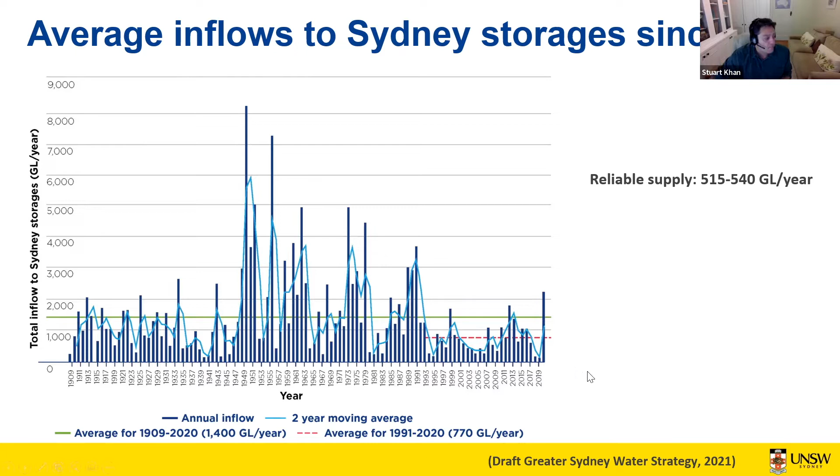And if we look at the current demand, it's slightly more than that - it's around 550 gigalitres per year. So we're already sitting at a point where we need to be thinking about whether we have enough water security in Sydney to get us through the dry periods.

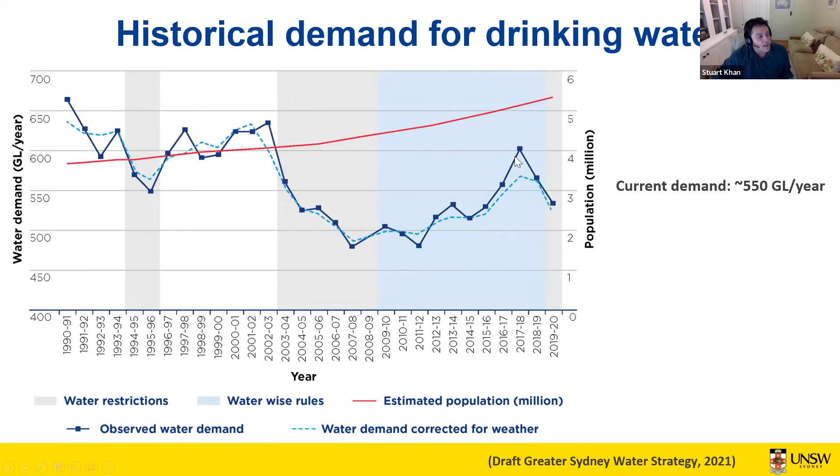So what we found is that during the millennium drought, when we found efficiency opportunities, after the drought finished and the water restrictions finished, people didn't suddenly rip out their dual flush toilets and low flow shower heads. A lot of that efficiency was maintained, and it's slowly increasing now, more or less in line with population growth. So we need to think about the fact that we probably already need to be planning for future water supplies, and that problem will increase over time as demand increases.

That's the way that we normally think about reliability of a water storage or water supply. However, the drought of 2017 to 2020 was a real wake-up call and made people start thinking about this in a little bit more detail.

We had a plan - the Metropolitan Water Plan in Sydney - which tells us that as water storages start to drop, you bring in new measures. You turn on the desalination plant, you implement water restrictions, and the restrictions get increasingly stringent. Eventually you build the next stage of Sydney's desalination plant, so we can supply 250 megalitres per day from that plant, but we can expand that to 500 megalitres per day. Then further down, when supplies really get low, that's when we start to say, well now we build the next piece of infrastructure - but it was never clear what that next piece of infrastructure was.

What we saw during the recent 2017 to 2020 drought, if you compare that to the millennium drought which had previously been Sydney's worst drought on record, is that we could go from more or less full dams to 50% capacity. It took about 4 years for the millennium drought, but this drought we went twice as quickly. There were fewer replenishment events, and the demand on that water stayed quite solid throughout that period.

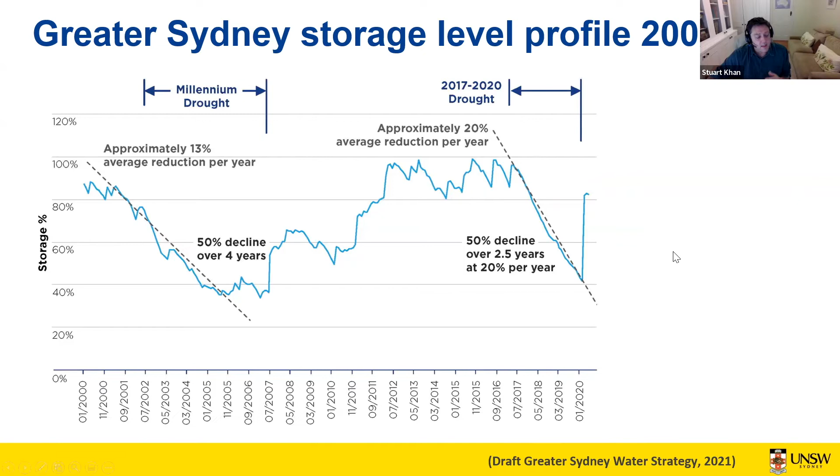Rainfall independent water supplies - so now we're thinking about needing a particular reliable yield that we can produce water from year after year. But not only that, we need to be able to get through these extreme droughts. The way it has been identified that we can increase resilience to those extreme droughts is to have some water in our system that is not dependent on rainfall - if it doesn't rain, the water is still there.

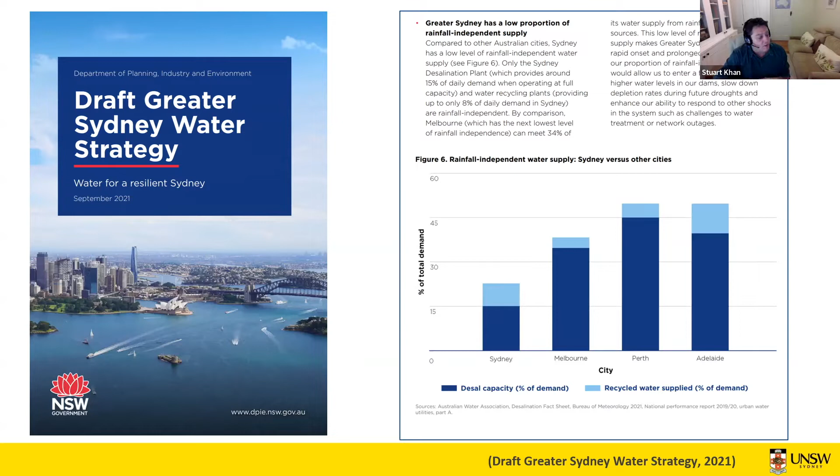That means we're much more vulnerable to a lack of rainfall, to drought, than some of these other cities might be. So thinking about how we've built in rainfall independent supply in Australia, most of our big cities now do have seawater desalination. It has been the first port of call. Seawater desalination is an engineering solution that often we end up with if you've run out of time to do anything else. It has the advantage that there's no competition for that water.

There are some public acceptance issues, but generally they're considered minor compared to public acceptance issues around things like purified recycled water. We see seawater desalination plants around the country that are now capable of supplying between 15 and 40% of the local drinking water supply, with Sydney at the bottom of that range.

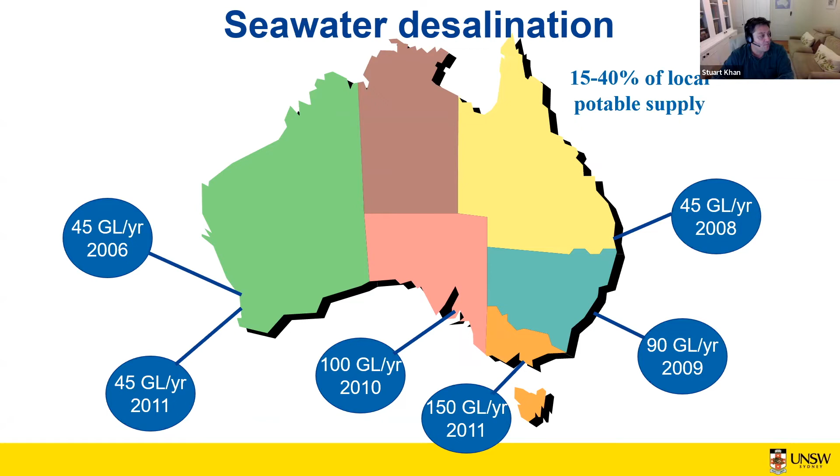In terms of sustainability, one of the big issues with seawater desalination is the amount of energy required to produce drinking water from saline water, seawater at 35 grams per litre salt. That was a really big issue when Sydney's desal plant was being constructed, and it was a big issue for all of these plants.

I think this is worth noting, how that has been dealt with to some degree. In the planning approval for Sydney's desalination plant, there was a requirement written in that the energy used by the plant, which is a significant amount relative to energy use in Sydney or New South Wales, would need to be offset by purchasing green power.

So Sydney Water, or the Sydney desalination plant, purchases green energy from a wind farm, the one down at Bungendore, which is the one that Joe Hockey said was an eyesore he doesn't like looking at. But there's a couple of really interesting things that came from that.

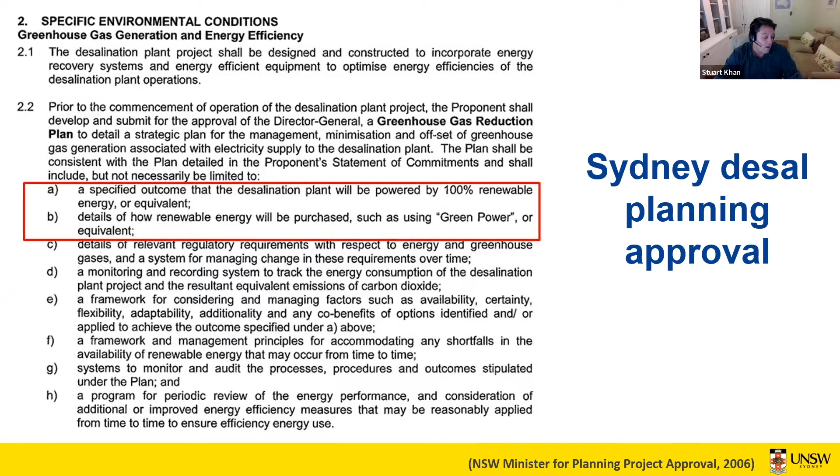To my mind, it really kickstarted and enabled the start of a wind energy supply in Sydney. It's a bit like when you think about big shopping centres, they need their big anchor customers, the Coles and the Woolworths, before it can be viable for Joe's bookshop or the smaller customers. It was this big anchor customer, the Sydney desal plant, that really made that wind farm a viable option, and therefore made a real contribution to the availability of renewable energy in Sydney.

That was a trend followed by all of the desalination plants at the time in Australia, and this isn't something you see in other countries. It's really a unique Australian thing, where all of those desal plants were approved with requirements to offset their energy, which of course comes from the grid, a coal-fired grid, but the amount of energy used from that grid was being replaced with green power, across the board at the time. There's been a little bit of backsliding on that, but not a lot.

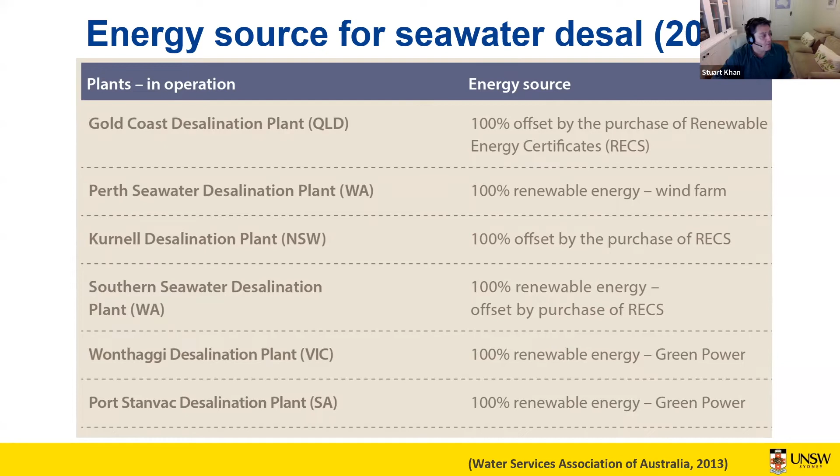So that's one form of rainfall independent water supply. Some other cities that are inland, for example, that don't have access to seawater, like Orange, have come up with other solutions. In Orange, they find that during a drought, when it rains, the soils don't generate a lot of runoff. Our catchments don't generate runoff because the soils are dry and act like a sponge, soaking up the rainfall that lands on them, so it doesn't run off into our dams.

In Orange, they built this urban stormwater harvesting scheme. There's a creek that runs through Orange, the East Orange Creek - in fact, this is really just stormwater drains, though this part is more of an open creek. That creek continues to run during droughts every time it rains, because the water in that creek isn't landing on dry soil, it's landing on impervious surfaces - footpaths, roads, roofs of houses - which then runs down and fills this creek. So the creek runs even when the drinking water catchment produces no runoff.

So Orange built a scheme at the end of the Millennium Drought where they capture the water from that creek, the urban stormwater - they store it, they treat it, and then they pump it into their drinking water supply reservoir, Suma Park Dam.

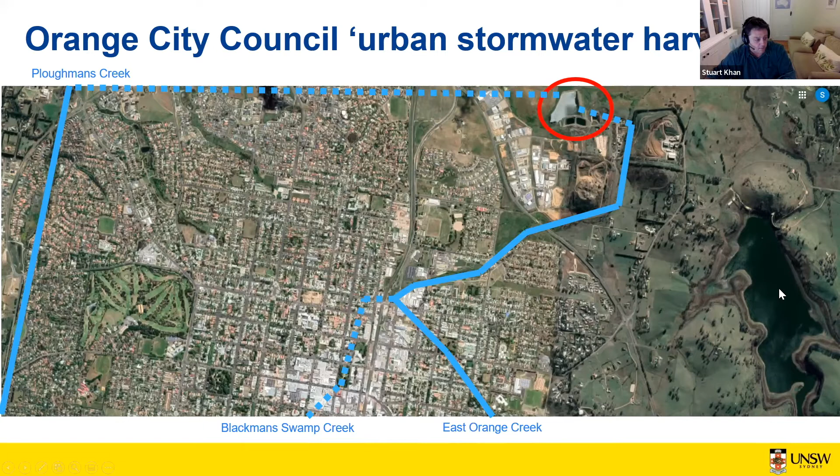This is an example - the ex-mayor of Orange, Reg Kidd, talking about how during the most recent drought, November 2019, they had a few small rain events in the last few weeks that didn't produce any runoff into their normal catchment, Suma Park Dam, but the stormwater harvesting scheme did. So it's a way to build in that resilience. You wouldn't call it rainfall independent, because obviously it depends on rainfall, but it's much more drought resistant - much less reliant on heavy rainfall than conventional catchments are.

Here's another picture I took off Twitter, of this lady, Manu Saunders, getting on an aeroplane in Armidale. She took this photo out the window, captioned: Armidale, where the only green spot on the landscape is the sewage treatment plant. You can really see it - it's very dry around here, but there's this lovely green patch, all being irrigated from water from the sewage treatment plant.

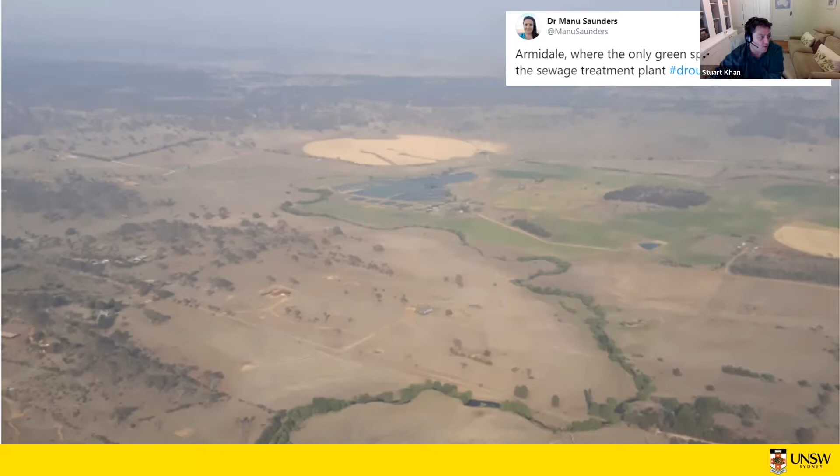So the sewage treatment plant is a very reliable source of water. Even during droughts, people tend to flush the toilet, have showers, and do all of those things. So we can learn from that, and think about the rainfall-independent, or rainfall-resilient, supply that comes from wastewater treatment plants.

There are lots of towns and cities around Australia that have started to make good use of that water from wastewater treatment plants, irrigating local sports fields, for example, and therefore maintaining those important community assets during drought and periods where there might normally be stringent water restrictions. So it's a resilient supply.

If you use that water for a use that you would have otherwise used drinking water for, then it ultimately adds to your drinking water, because you're taking an equivalent load off the drinking water supply. Furthermore, if you use it for a use that you would have applied water restrictions during a drought, then you still can potentially have that.

So this has been a very reliable, very successful thing to do for towns and cities around Australia for the last 30 years - recycling treated effluent for various irrigation purposes.

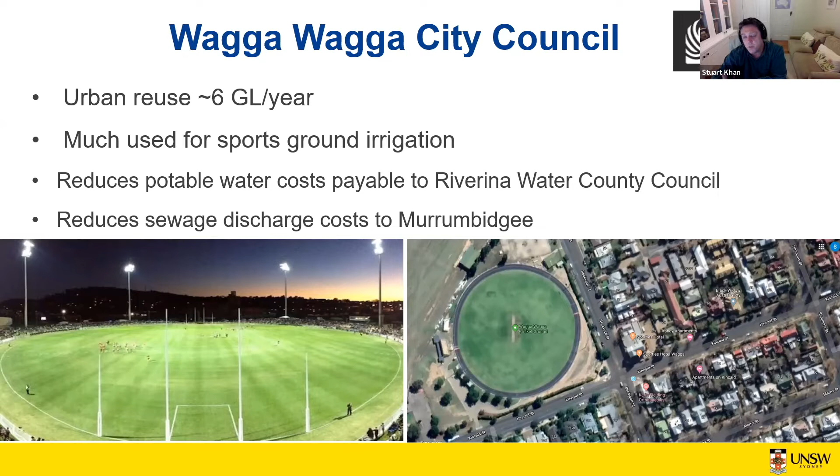And most local government areas don't have that type of storage availability. There are some exceptions, but generally it means you're only using a small fraction of the total wastewater that you could potentially be getting benefit from.

So that's why we've seen cities like Perth, for example, start to say, well, let's use the storage and distribution infrastructure that we already have for our drinking water supplies. Perth has been drawing down on their groundwater for decades, and they've started to say, well, we could take our treated effluent from a wastewater treatment plant, invest the money and energy in purifying that water...

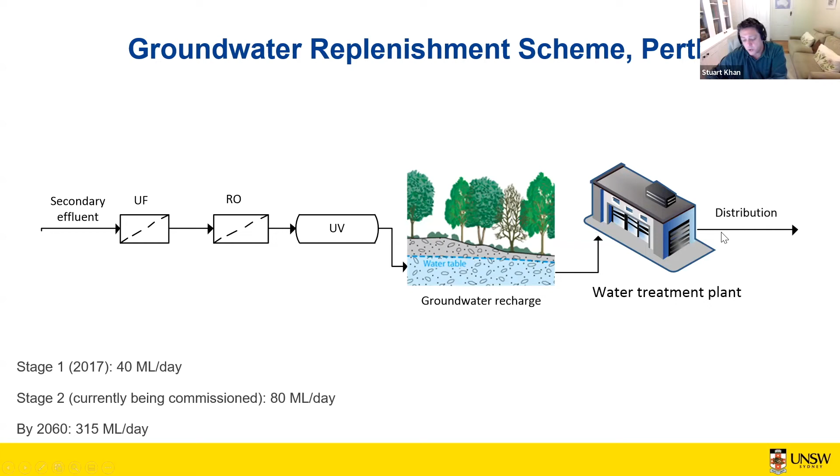...so that water is of a sufficiently high grade that we can now recharge our groundwater system that we use as a drinking water supply. So they pump the water underground into the groundwater supply, and then that becomes part of the drinking water supply. So they are reusing that water now, but without having to think about segregated uses and seasonal uses. It's stored and ready to be used in the same way as the rest of the drinking water supply in Perth. We've seen other purified recycled water schemes constructed, but they haven't always been as widely adopted for use.

In southeast Queensland, supplying Brisbane, the main drinking water supply is Wivenhoe Dam. It's been in the news the last few days because it's flooding up there, and it's flooded during the last few big events that we've had.

But there is a scheme constructed for when it's not flooding, when it's getting closer to being empty, where they can take purified recycled water from a series of wastewater treatment plants, treat it by advanced water treatment processes, and use that to top up Wivenhoe Dam. So they don't need an extra storage - they use the one they have, and that water mixes with all the regular surface water in that dam, is treated at the water filtration plant, and distributed to customers.

They built this scheme at the end of the Millennium Drought, which said we need some way of keeping water in Wivenhoe Dam. That drought, like the more recent one, was broken by flooding rains. Since the Millennium Drought, they haven't had the water supply shortage in that dam where they've actually needed to use this scheme, and they can't use it when it's flooding and the dam's full, because they're relying on some space in that dam which they don't currently have.

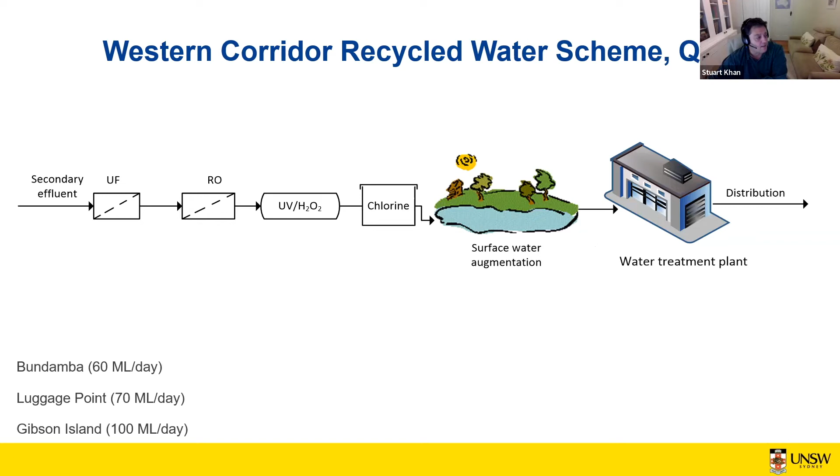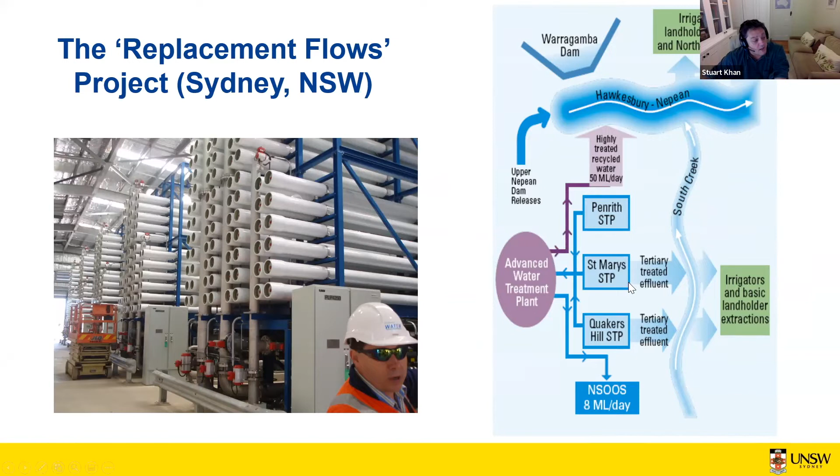The Nepean River at this point flows downstream, and a little bit downstream is the North Richmond water filtration plant, which is a drinking water supply for parts of northwest Sydney around Windsor and Richmond. So there are lots of examples of ways that we make use of what is ultimately a rainfall independent supply as part of our drinking water supply.

So how do we start to think about choosing between these different options? There are lots of questions I can't go into in half an hour. But one of the things we'd be interested in, if we're talking about sustainability, is energy - how much energy is used to supply water through these different treatment processes?

We had this hypothetical study done a couple of years ago. We got a big engineering company, GHD, to look at the design of a scheme the same way they'd look at any other design, but this one was completely made up. It's not a real city, and we wanted to compare some of the different options and look at the costs, the energy, the materials used, and the greenhouse emissions with some of the different options.

I won't be able to go into all of those details, but in this city, you have the ocean over here, and here's a dam - you could think of this as Warragamba Dam up in the catchment. The water flows down to a water treatment plant - you could think of that as Prospect. So we have our potable water suppliers supplying water to customers, distributed areas, more dense areas, parts of the city.

They'll produce wastewater, which might be used for recycling in this case. So here we have a recycling scheme, which is for non-drinking purposes - this is like a purple pipe dual reticulation scheme where recycled water might be sent back to houses just for select purposes like flushing toilets and watering gardens, but hasn't been treated to the degree necessary for drinking.

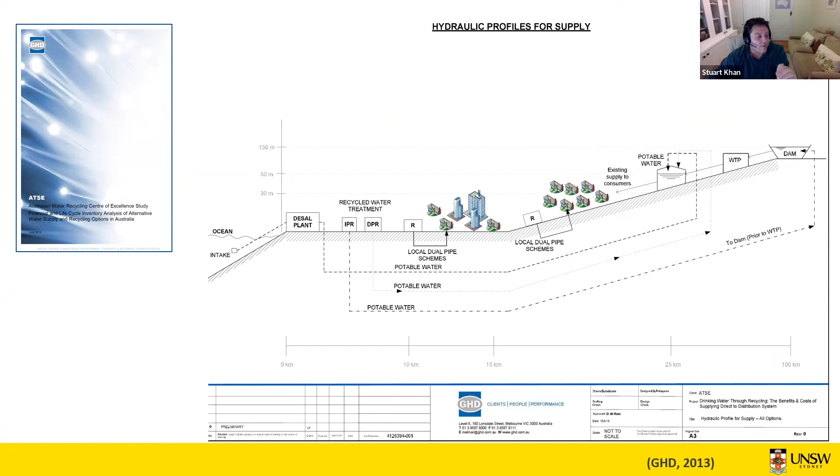So you could design this any way you want. You could make these things higher, lower, further, closer, and probably come up with any answers that you want. So the absolute answers don't mean anything, but they help us to look through what are the factors that lead to a high energy use, a high cost, or a high carbon footprint.

So with this example, what you see here is seawater desalination. We're looking at energy, the amount of energy that's required relative to the volume of water that's produced. And we see that we have a lot of energy required for the desalination plant, all in production. The treatment process is very energy intensive for seawater desalination.

The blue bit here is pumping it back to where it needs to go, and in this case we're assuming we don't need to pump it very far, a bit like Sydney. Sydney's desal plant, the water comes under Botany Bay and then into the distribution system in Erskineville, behind the Erskineville Bowling Club there. It's not a huge distance, so you only have a little bit of extra energy required to do that.

If you look at indirect potable reuse, treating wastewater is actually more energy efficient, requires less energy than treating salt water from the sea. So we have a lower energy footprint for the treatment, but we have to pump it all the way up to the dam in this case, a high elevation and a long distance. So we actually end up with roughly the same amount of energy requirement in this example as what was used to treat it.

If you go to direct potable reuse, you still have to purify the water, so it's the same as indirect potable reuse, but you're pumping at less distance because you're not going all the way up to the storage. You might just go somewhere into the supply system. And then here you have this dual pipe system where you're not investing so much energy in treating the water.

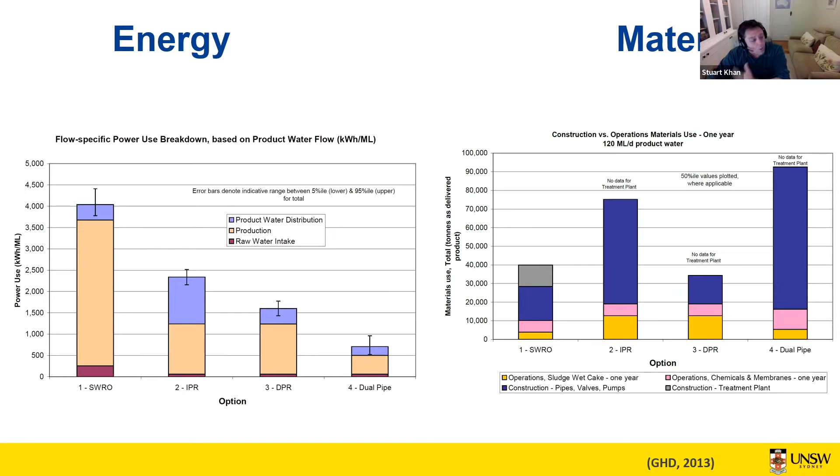What's the quality of the water that you're starting with? What sort of quality of water do you need to produce? How far do you need to transport that water? How distributed does that water need to be? How much can you rely on the existing infrastructure as opposed to having to produce new infrastructure? These are all the criteria that help us to understand what you'd be looking for if you were trying to design and build a sustainable water supply.

So the last bit I want to talk about really comes back to this climate change question and being resilient to extreme weather events. So we all know we went through this horrible period, first of all of drought from 2017, right up to the end of 2019, and then the fires.

What we started to see with the fires, apart from all of the very high profile destruction and loss of life and property and homes, water supplies, many water supplies also struggled during that period.

And so we saw lots of impacts to water supply infrastructure, pipes, valves, pumps, but also the less obvious things like the electrical supply to a drinking water treatment plant. You can't operate your drinking water treatment plant if the power poles have all been burnt down and there's no power being supplied. So we saw real gaps in resilience of being able to continue to provide reliable, safe drinking water during these fires.

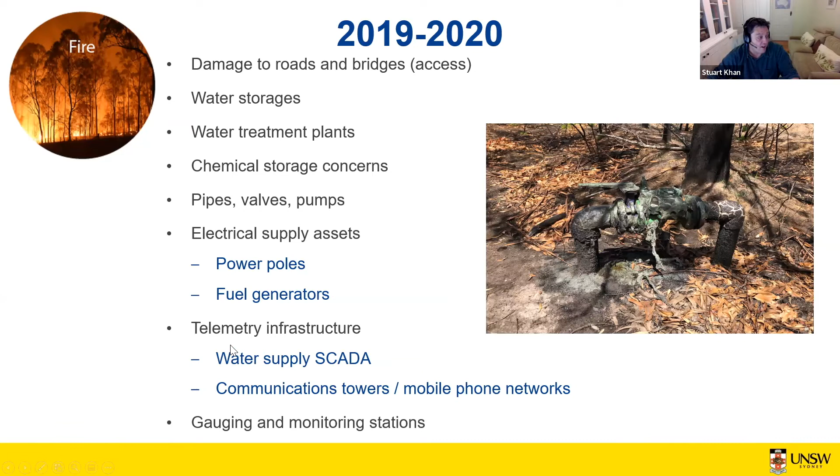That's something that we'll need to think more and more about if extreme weather events are going to be things that become more frequent and more intense, as we expect that they will.

There were lots of water treatment plants around Australia that failed to the degree that a boil water alert had to be called for communities relying on drinking water from those plants. Some failed because the plants were actually damaged and impacted by fire, losing power and operations. Others failed because the water treatment plant was the bottleneck in supplying water, needing to provide water at a faster rate for firefighting than the plants could treat it.

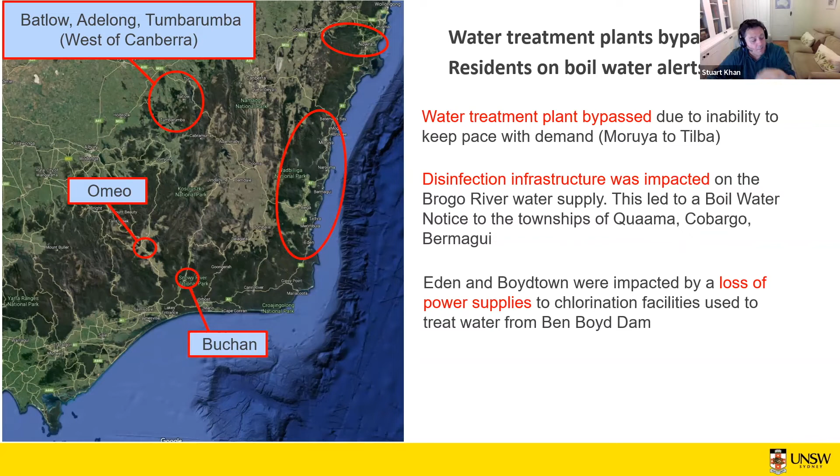So the water treatment plants were bypassed, and unsafe drinking water sources were used in those cases, meaning the water produced was not sufficiently safe for consumption without boiling it first. More and more, these are things we need to think about building resilience into our drinking water supplies going forward. Even worse than the fires was when the floods came.

After the fires, we had lots of impacts to raw water in river systems. Our catchments were burnt, and a lot of the forest material ends up as ash on the ground. When the big rainfall events came along, they washed that ash into waterways, so we end up with sediment, organic carbon, and nutrients in our waterways, making the water very hard to treat in some cases, or impossible in others. Water treatment plants were not able to deal with it, elevating the difficulties of producing safe drinking water.

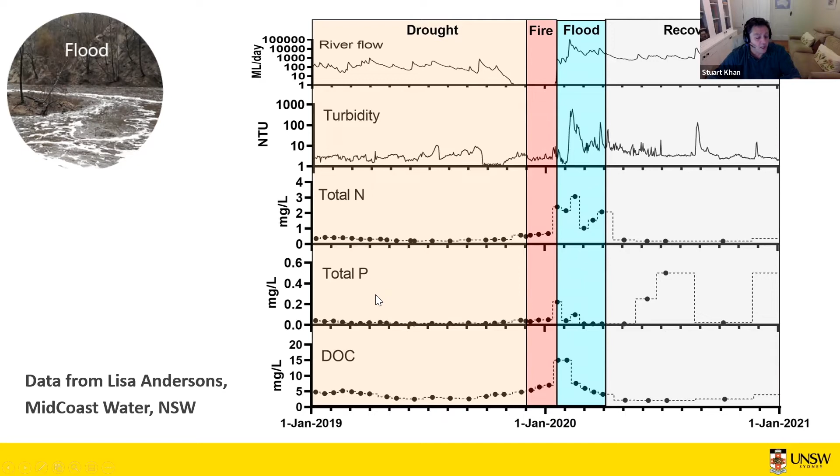I'm only singling it out because it really did struggle. They were on a boil water alert for a long time because they weren't able to treat water, due to a few factors. One, they didn't really have a water filtration plant, just a chlorination system. So all of the ash and turbidity that ended up in the raw water in Brogo Dam couldn't really be treated just by adding chlorine. The chlorine just reacts with all the organic matter and things that are there, so they couldn't produce clean water that way.

Another feature is that this dam is a classic impoundment across what was previously a river, the Brogo River. So all of the water washed into this river comes down and is trapped in the dam. What comes down the river is what you get, and there's no real way of dealing with that. There weren't alternative water supplies—to a degree they trucked water down from another source, but there aren't alternative supplies they could use to directly supply this city. So there was a single water source, really quite vulnerable given the catchment being burnt and the impact that would have on water quality, without being able to do anything about it.

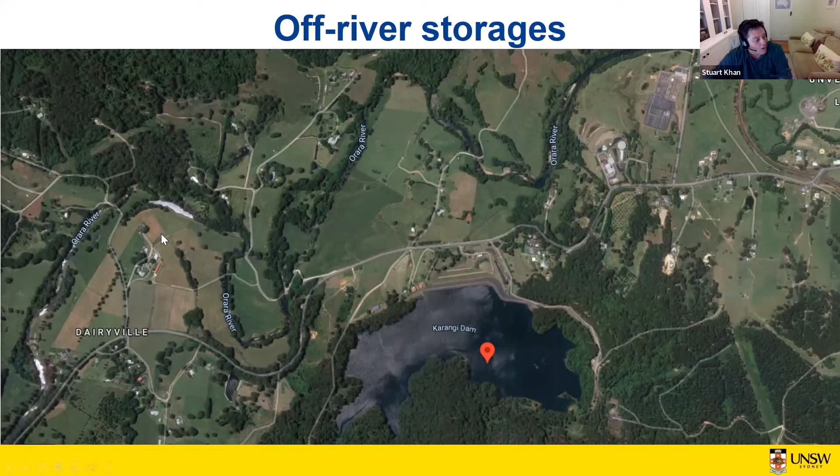And we saw that for Shoalhaven.

Shoalhaven had horrible fires up in the catchments around the Shoalhaven River and the Kangaroo River, both of which feed Tallowa Dam. Water is released from Tallowa Dam and runs down the Shoalhaven River. Shoalhaven have a couple of off-stream storages, the most important one being at Bamarang, on the southern side of the river. They pump out of the river into this storage at Bamarang, which goes into the water treatment plant.

So even though there was really devastating impacts in the catchment here - these are all the fires, the area that was burnt out - huge impacts in the catchment, very poor water quality coming down the river. But Shoalhaven and Nowra weren't relying on it. They were relying on water from this off-stream storage, which the fires got very close to, but they were lucky they weren't directly impacted.

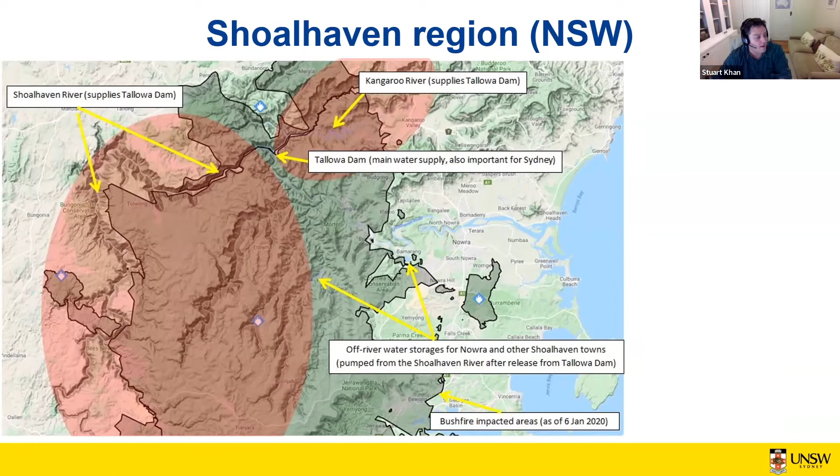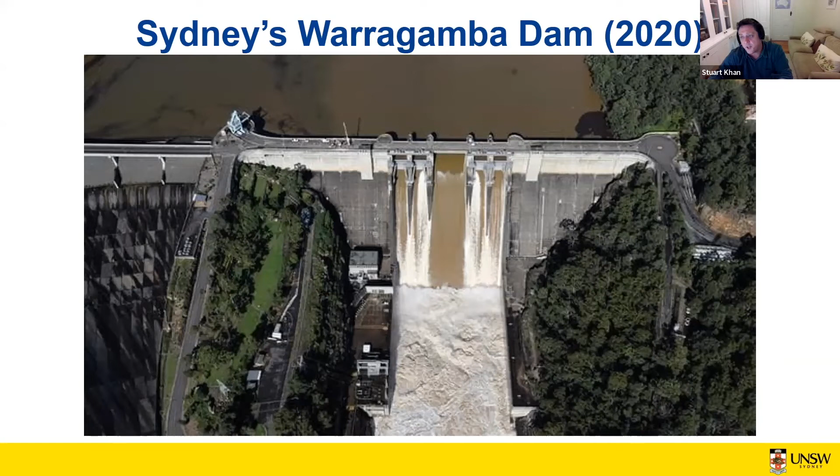So lots of places ended up with water that looked like the water in Warragamba Dam at the time - it's chocolate milk, full of sediment. Sydney Water is still dealing with compromised water quality and the way they're having to deal with it at Prospect Water Filtration Plant.

But Sydney has a couple of advantages when we think about resilience and how we can manage that water. One is flexibility that comes with being able to take water from different levels within the reservoir. Often we take water close to the surface because that's usually the best quality water, but if there's a lot of sediment, or even something like an algal bloom, we can go deeper down and deliver water from other levels, targeting the best quality water.

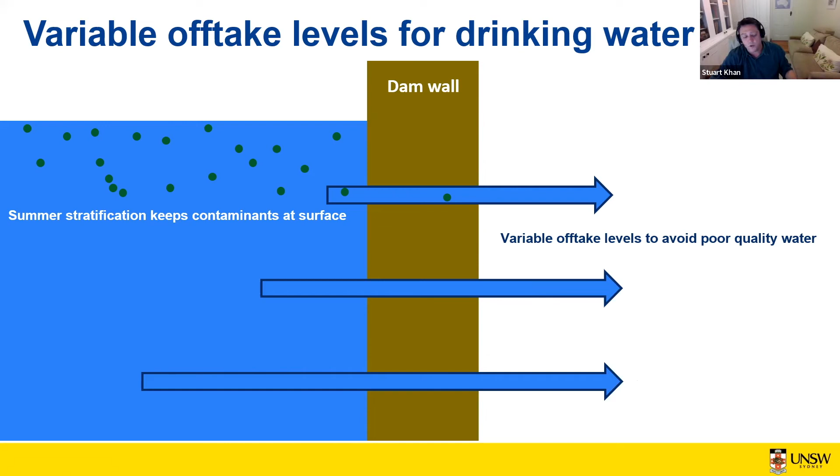That's something you can't do on a small dam like Brogo Dam, but you have the opportunity on a big dam. I'm pointing it out because it's an example of flexibility, and it's that flexibility that gets you through these different times, being able to change the way you do things and supply water in a different way.

The other way Sydney got through those events was also because of flexibility - because of this big complex system. Most of our water is treated through the Prospect Water Filtration Plant, and most of that water traditionally comes from Warragamba Dam. But as many people here would know, we can also supply water from the southern dams up through the Upper Canal into Prospect Water Filtration Plant.

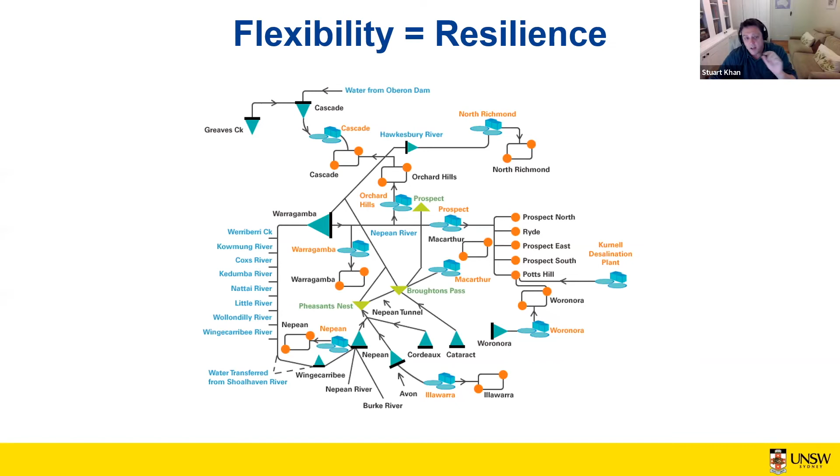We can take water from Prospect Reservoir itself for short periods of time. It's not a huge storage, but it can contribute to the water available. We can also take the demand off that water by supplying from the seawater desalination plant, which is something we continue to do for that purpose. So that's 15% of our water coming from here, unaffected by the water quality impacts going on elsewhere. This tells us that if we want resilience and flexibility, this is another way of building it in - being able to draw from different sources and choose the appropriate source at the appropriate time.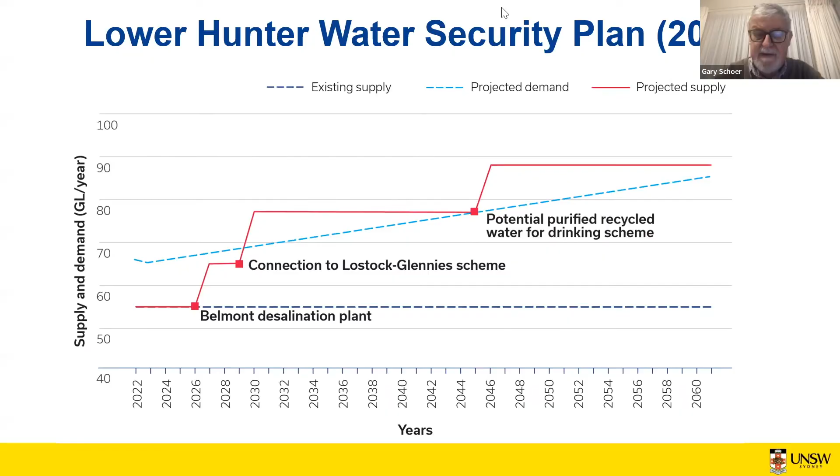I've got it, righto. Yes, I just wanted to ask about where mining does take place in drinking water catchments, and we all know about losses through the mining operations, particularly where there's mine to surface breakages and other impacts on upland swamps, etc. What do you think are the best ways for mining companies to address that in a sustainable way, to replace the water that they have lost or used?

They do say, the mining companies say, that there will be offsets for water that is lost. Yeah, absolutely, so we know there are losses, for example. I don't know that I can really give a great answer to what's the best way for them to address it—it might be something we're talking to Ian or others about. To me, those are losses that are not easily recoverable because they end up at a low elevation below the catchment, and they'll just be discharged at a lower level that won't be recaptured.

So I don't have a good answer to how you offset those. Robin, did you want to unmute and ask your question?

Sure, hi everybody. My question is about the Wollongong LGA in terms of our topography and, I guess, just regional context. Did you have any insights into what you thought might be a sustainable water supply system here?

Yep, so Wollongong has a pretty nice water supply, obviously coming from Avon Dam. I guess if you look at resilience, it's like a few parts of the overall Sydney water supply, where it's a bit of an arm that comes off the rest of the supply, relatively highly reliant on a couple of key pieces of infrastructure. So in Wollongong, you don't have that system I put up for Sydney, where we can bring water in from different directions. It's really the one storage, the one water filtration plant, and distribution through that.